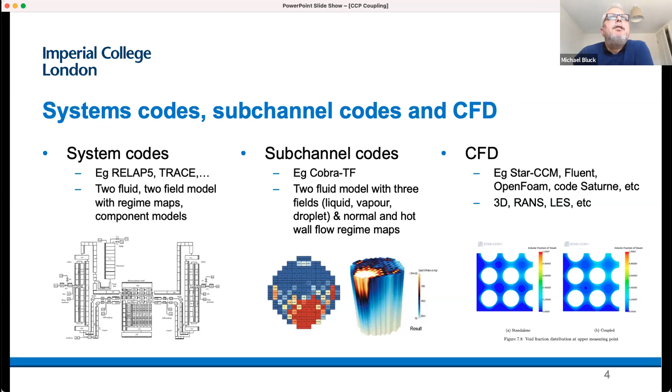So what I'm going to move on to is really a very top level view of some of the things we've done, and this is really very brief, and I can't say an enormous amount because it's quite proprietary, of work we've done with Rolls-Royce, and their desire to couple, in this case, a subchannel code with a systems code, in particular CTF as a subchannel code and RELAP 5 as the systems code. And the coupling of RELAP 5 in particular has been a long-standing aspect of its development, and in particular it's embodied in terms of coupling using, well, they call it an API, it's not really, called R5EXEC.

And so in this context this was an ambition to initially couple proprietary code like RELAP 5 3D with CTF, very much a legacy code, but accepted as far as Rolls and the regulator was concerned. And the API that RELAP 5 3D in principle uses for coupling is R5EXEC. Again, it's proprietary, and it's a coupling tool based on PVM or variants of, used to accomplish data transfer between the codes. It's not a true API. It's essentially really a scripted control mechanism. And whilst the code manuals will tell you that it can couple with anything, and there's a number of codes there, the requirement here is that these codes have the relevant R5EXEC hooks in them to communicate using PVM.

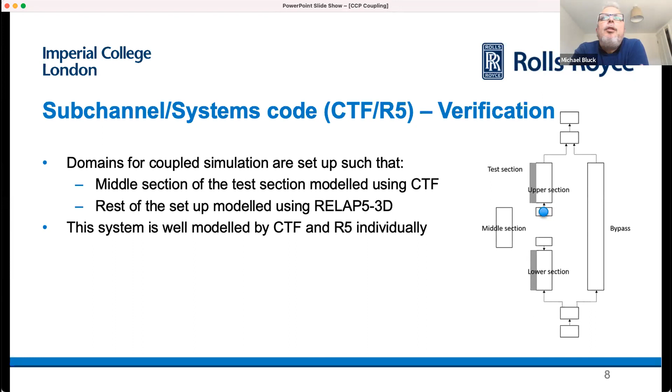So validation and verification is important. This is a verification, a very simple case of a test section and a bypass channel. In this case, the middle section here is modeled using CTF, and the rest of it is modeled using RELAP. This is very much a verification process rather than validation, as this system overall is pretty well modeled by CTF and RELAP5. And the verification process is pretty reliable.

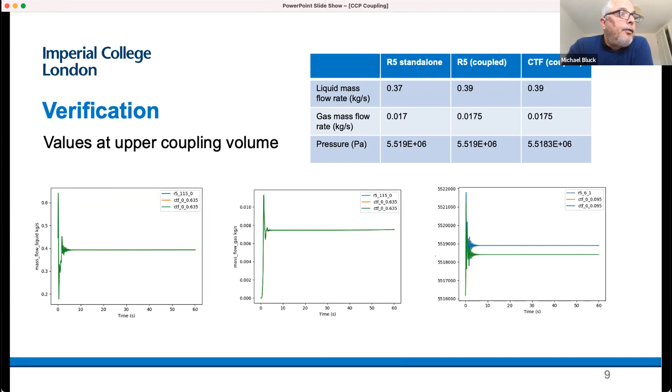The liquid and gas mass flow rates are very well predicted, as you can see. Possibly one issue is a deviation there for the pressure. I think, as Antoine said, the pressure converges a bit more slowly, but those are small differences. This is just a verification activity to make sure that things are doing what they should. I won't be able to give any more detailed and more useful verification and validation due to commercial issues.

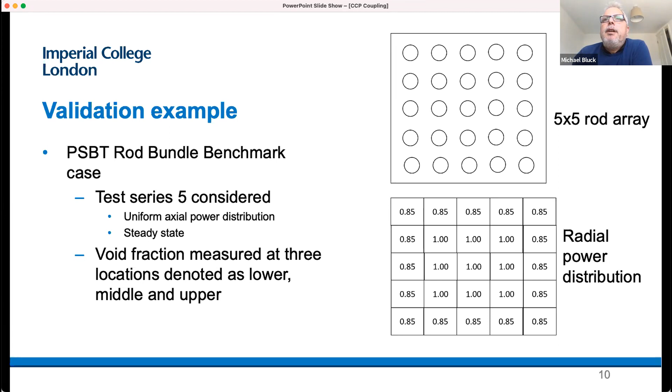A validation example is a PSBT rod bundle benchmark case, test series 5 of those considered. It's a bundle 5x5 rod array with uniform axial power distribution. We're looking at the steady state, the void fraction is measured at various locations, and it's got a slightly inhomogeneous radial power distribution. All we're doing really is modeling the test section in CTF and the cold leg and the hot leg using RELAP5-3D.

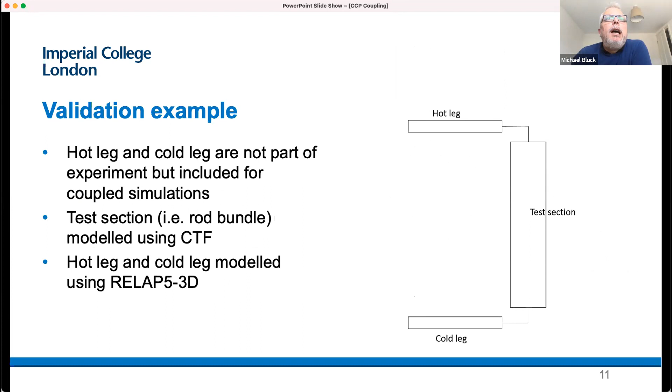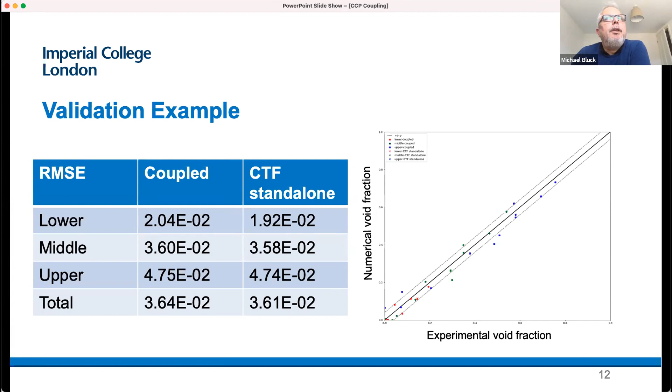So that's an example of coupling, in a fairly clunky way, a subchannel code with a systems code. The next one I'll move on to is coupling RELAP5 with a CFD code, in this case STAR-CCM+. The constituent codes are STAR, which is proprietary, and RELAP5, again proprietary, and legacy as well. The API used here was, at that time, 2016, the co-simulation API in STAR-CCM+. Again, domain decomposition, a client-server model, synchronous communications. And rather like the last case, for broadly the same reasons, RELAP5 on the coupling side was done via file IO and a restart.

So comms are through the COSIM API on the STAR-CCM+ side and file IO on the RELAP5 side. And there was essentially a wrapper acting as the client, called COWS, COSIM 1D wrapper. And again, the mapping is important for

the coupling of CFD. Going from the CFD to systems code is relatively straightforward. Going in the other direction, you need to recreate the velocity profile. You also, going back from CFD into RELAP5, need to make sure that you are consistent in producing the appropriate flow regime map. It's not just a matter of passing those variables.

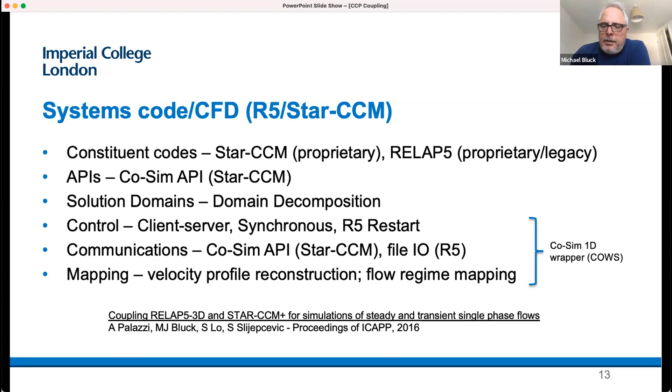And the control is, as you see here, there's a wrapper essentially around that acts as a client to enable and manage the communications and the mappings from one to the other. Okay, so that was a RELAP5 STAR-CCM+ coupling. Oh, sorry, let me just

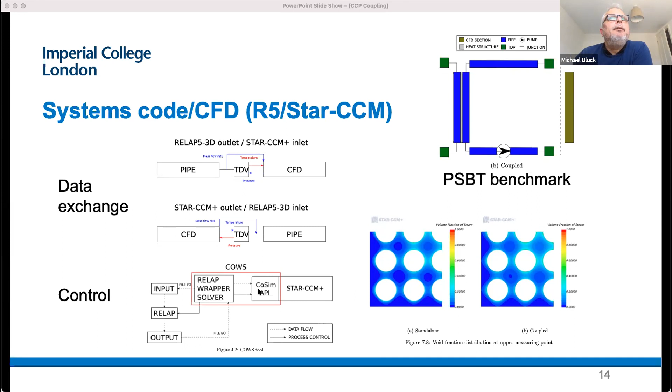a different case now, which was the coupling of a systems code again, MHD SYS. So this is a magnetohydrodynamic systems code with OpenFOAM. And the advantage here is that in both cases, these were open source and in-house written in terms of MHD SYS. MHD SYS is a magnetohydrodynamic systems code for fusion blanket duct flow applications.

It deals with Hartmann type flows, whether it's Shercliff and Hunt type flows. So the velocity profiles when the magnetic fields are high are very different to those in normal hydrodynamic cases, including wall jets and so on. So the particular profile reconstruction is very different.

MHD SYS also deals with quite heterogeneous heat transfer. Because of the very different flows, you've got very different local Nusselt numbers on different walls of a duct, depending on the orientation of the magnetic field. And you've also got the potential for through wall magnetic field and momentum interactions. So the flow in one duct actually affects the flow in the neighboring duct.

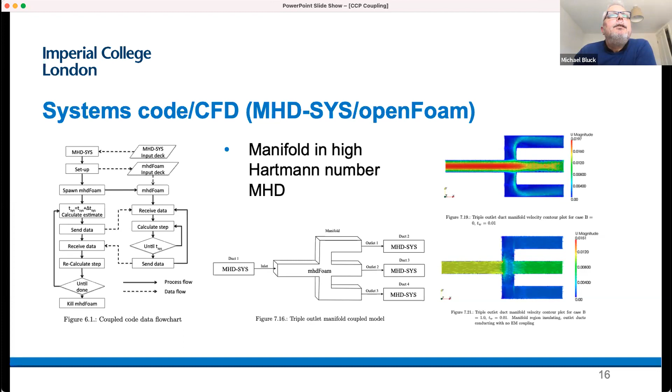And you'll see the effect of changing the magnetic field. So this is no magnetic field in this upper case; here we've got a very significant magnetic field, and it radically changes the flow, as one might expect. Okay, so that's really just an application where we have sort of full control, if you like, and full access to codes.

And just one final one. Again, this is looking at the development of interfaces and various protocols. We're looking at developing the coupling between STAR-CCM+, again proprietary, with an in-house open source natural circulation systems code. It's a test bed for dealing with situations that most systems codes don't deal with very well, surprisingly, which is low flow rate natural circulation. And so again, that's written in-house.

Really, a lot of our work has been looking at how we practically implement in a broad range. So with the release of FMU in STAR, that's what we're intending to evaluate, really, as much as anything. So that's still under development. So just to conclude, I've provided a very broad overview of practical elements, and a few cases outlining the implementation and what effect certain choices make.